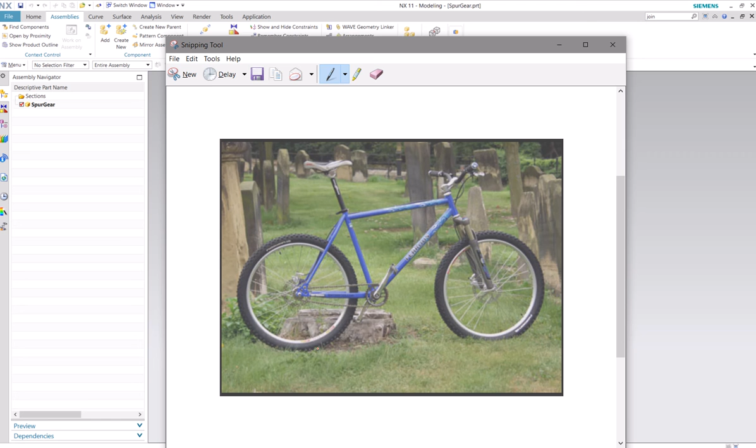Okay, so now we're gonna try and put all this stuff together. So if we're looking at the back gear, let's say this is the one we made, this gear, and this is the other gear up here, and this is the chain. We're gonna try and make next sort of a guide pattern that goes along here, just have something to guide the constraints and lay all the chain links on.

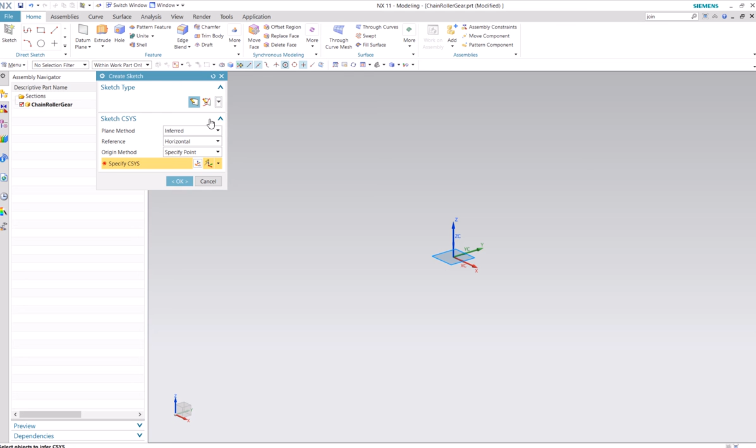So let's make a new assembly in whatever folder, chain roller gear Spur. Okay, not gonna add anything for now. Just do a sketch. Whatever. We'll do that one, and then we'll do that guide that I was just talking about.

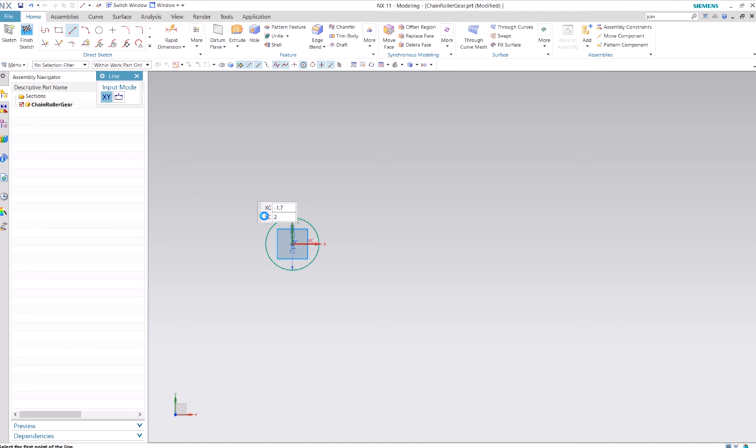Our diameter where the chain is, the path that's gonna follow along, is 1.9 on the gear that we made. And let's make just a guideline, let's say 8 up here, and then we'll put another circle up here to represent the front gear. Let's say it's 3. I'm going to delete this and then add lines attaching these two from the edge to the edge.

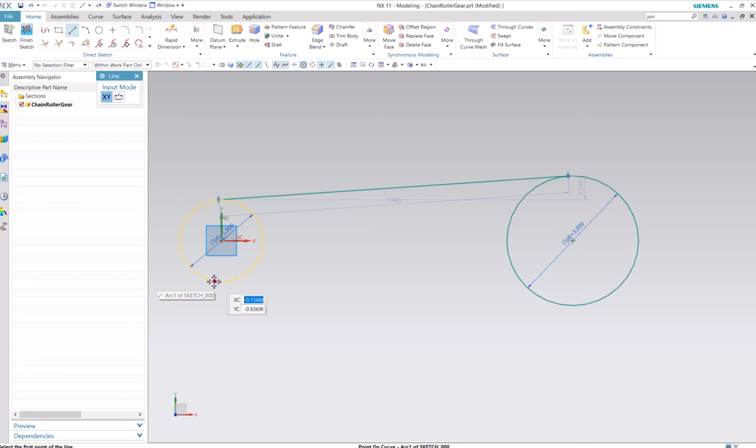Same thing down here. Okay. And then trim away the insides. Okay, hopefully that's saved.

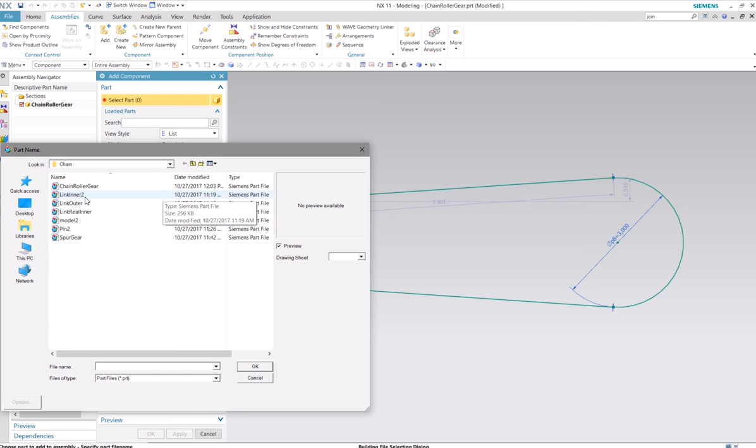Let's bring in one of those chain components. So we'll add the link inner 2, which is actually the link outer, I guess, for this case. We're going to want the reference set to be entire part and not model, so make sure you change that. That should bring that in.

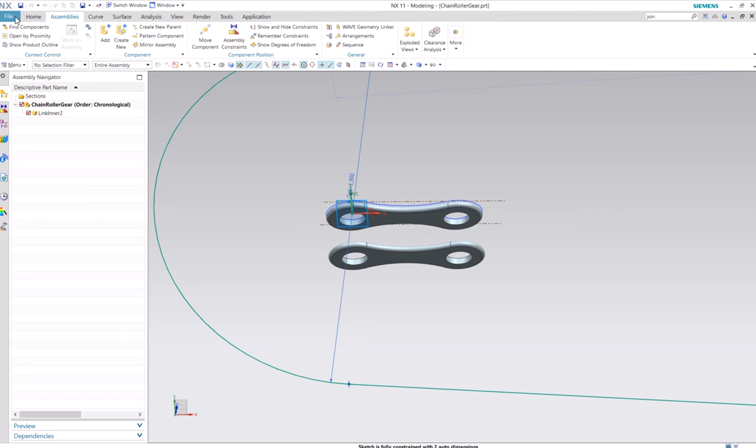Looks like our guide features didn't get saved, maybe. Let's check on that real quick here. Alright, so let's throw those in again. Maybe yours will still be there. I thought we did this for both.

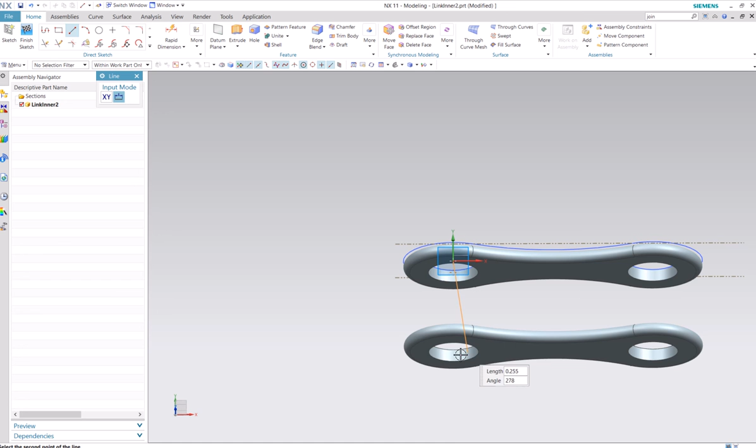Okay, so that's just a center line here to here. Okay. Reference and a point at the center. Okay. And we'll do that down here. To the center. And point at the center.

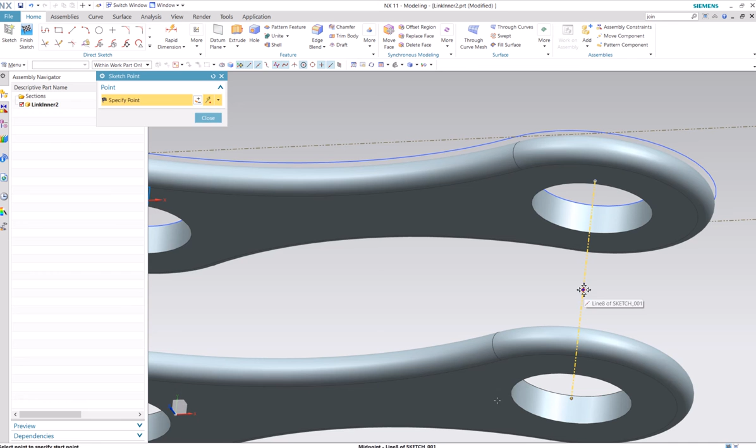Alright, and save this time. Alright, now hopefully that works. We'll go back into our chain roller gear. Okay, there it is, good. So that's what we wanted to see.

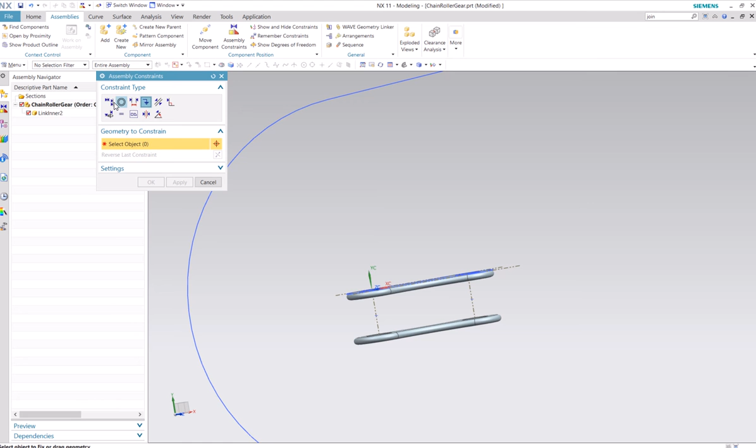Alright, so now we'll do some constraints with this. We'll do assembly constraint, we'll do a touch, and we'll just pick the little point in there, and then we'll pick our, hang on a sec. Oh, right, one thing first with this outer guide is that

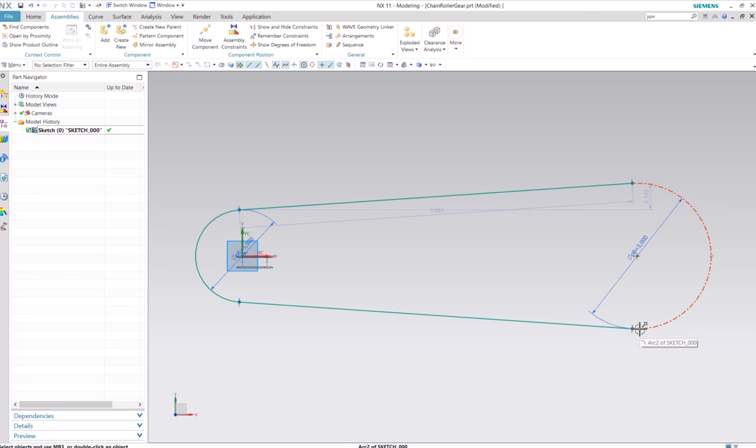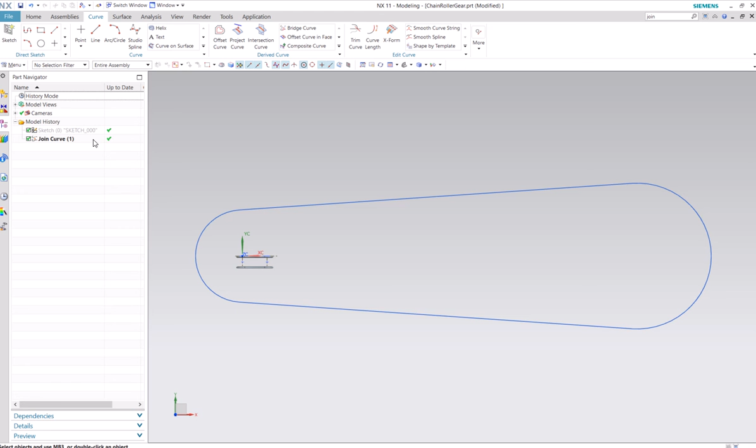we're going to want these curves to be joined, so we'll just, where is that curve, more join curves up here, and then it's already picked them for us, so it's selected the 4 on the outside, and we'll just join those, so that'll give us a join curve instead of individual little lines. So we'll hide that sketch and just leave the join curve available to constrain to.

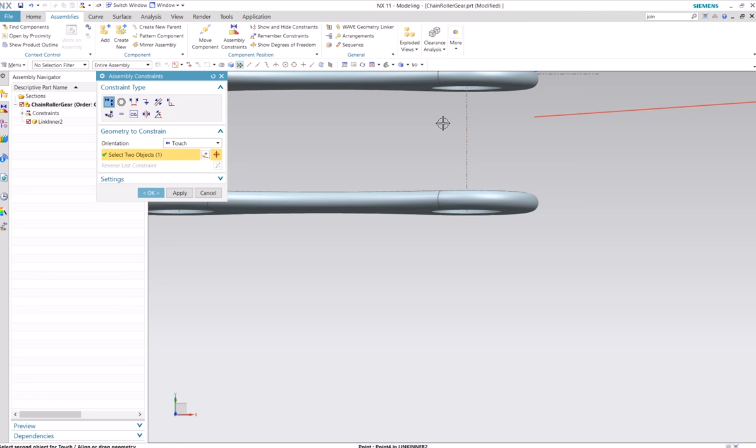So I'll come back here to our constraints, and then we'll do a touch from this point to this line, and same thing back here. Point to line. That'll stick that on there.

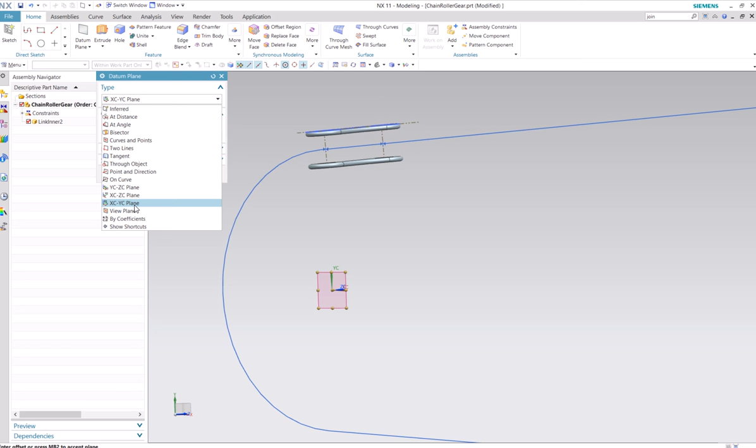Okay, so now this isn't the right direction that we want. We want this to be rotated 90, I guess, so it can travel along this path. So we're just going to throw in a datum plane, and we'll just make that an XC, YC, or whatever is sort of in the same plane as your curve. So this is all parallel to this. 0 inches is fine. That'll be a good reference for our assembly constraint of parallel.

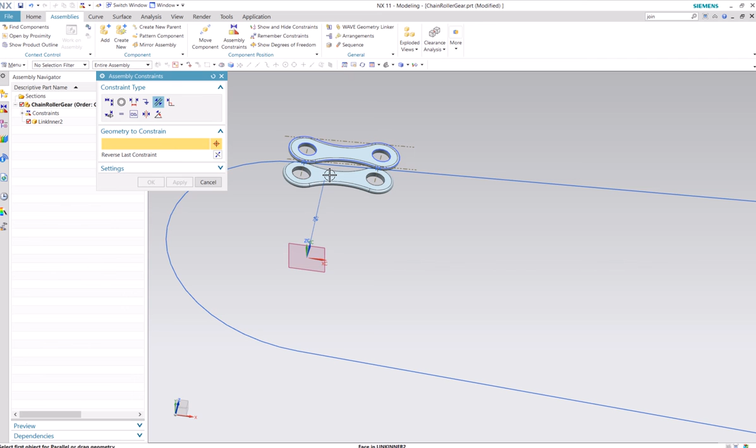We'll select the datum plane and then one of these faces here. So that'll turn that around and make that parallel. So now we should be able to move this, right click, move, and by dragging it, it should stick to that curve that we made there. So it kind of just works itself around there. Like that. Good.

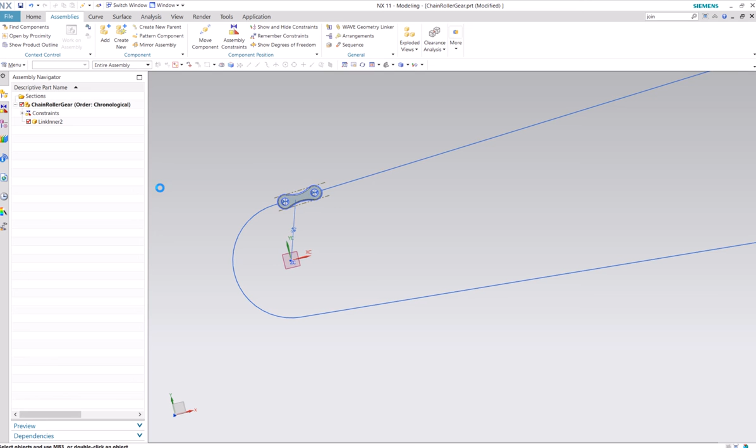Okay, so that's a good start. We will save that and then add a new part. We'll add the real outer. Let's check in the folder. Or real inner, I guess. Make sure it's entire part. And then OK.

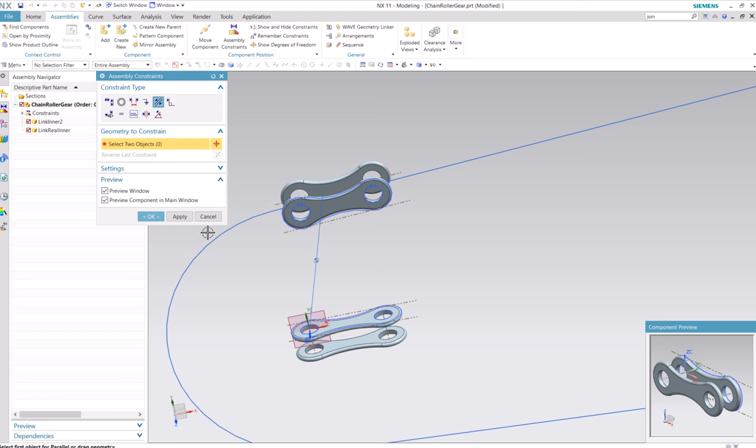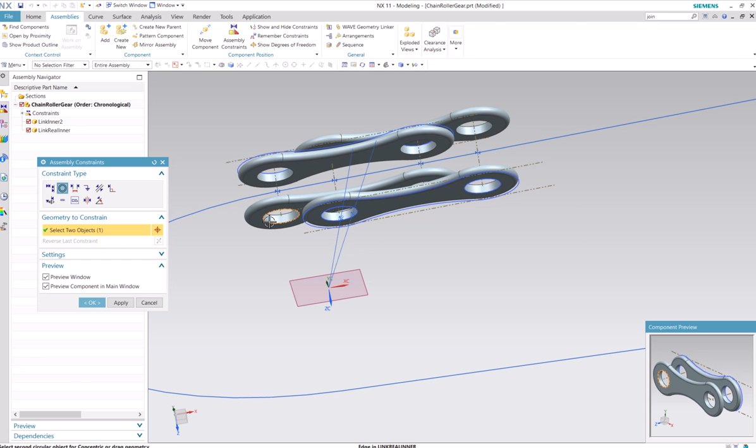Alright, we will do, I guess we can start with the parallel. And we will throw in a touch. Point to line and point to line. And then we'll just do a concentric outer edge to inner edge here.

Okay, looks fine, and then we will add in the pin into. Okay. Alright, I guess we can just do concentric with this one. And we'll reverse that.

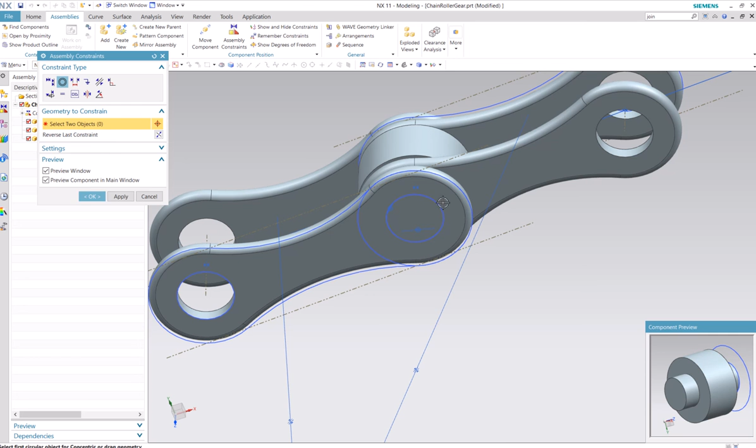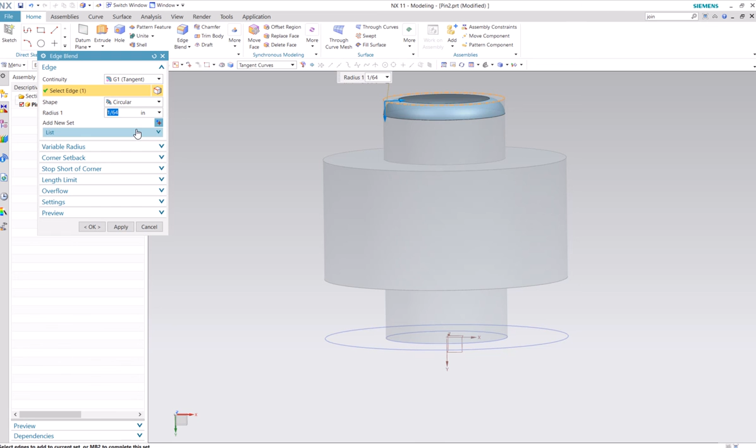Alright, that looks fine. Let's make a little change to the pin. We'll add an edge blend here. What is that, 1/32? No, 1/64. Yeah, and down here too. That should make it look a little nicer.

Go back to our chain roller gear. Okay, so now we see that in there. Yeah, that's fine. And we'll add in another pin.

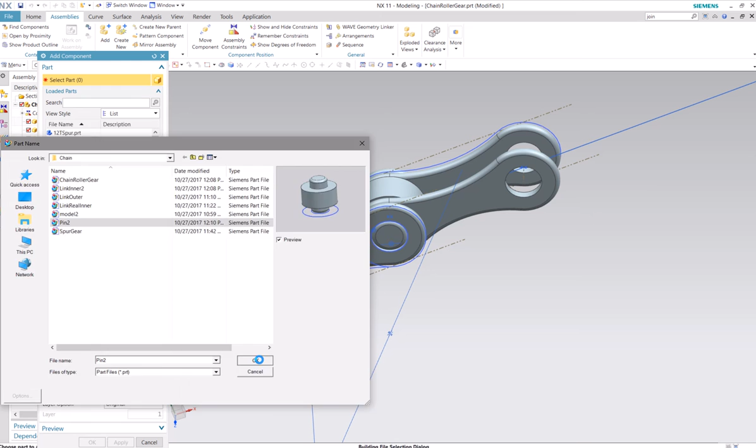We'll do concentric to here, and it pops it in there for us. Alright, so now we're just going to pattern this stuff out to kind of make it follow along this line.

So we'll do pattern component. We will select our components, so 1, 2, 3, 4, and we'll do linear. Let's do 6 or something. So these are 1/2 inch apart each, so 1 inch is fine. So this is kind of the base unit - it's 1 inch long from here to here, the repeating unit, so that should work.

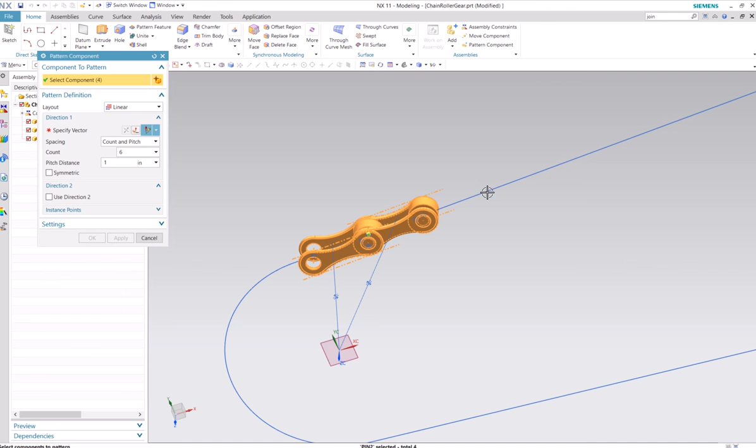We'll pick the vector. We will not pick our line. We'll turn the sketch back on. Let's see if that lets us do this. Pattern component. Okay, pick our parts. Linear, vector. Okay, so we've picked our vector.

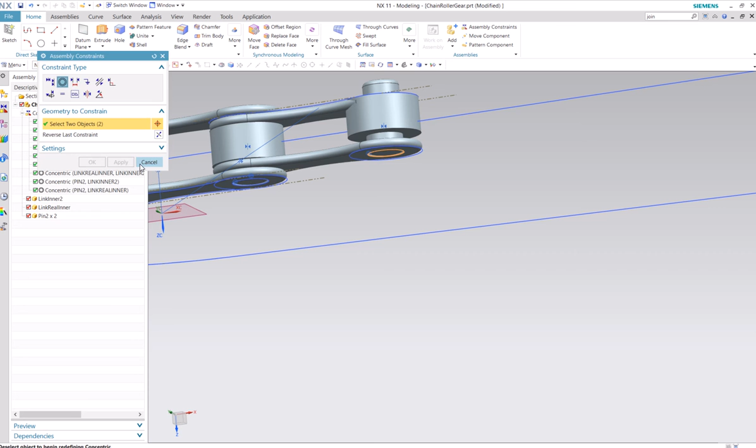We'll flip it around. Oh, looks like I constrained that pin wrong before. Alright, we'll fix that. Just redefine, and I'll delete that, and add a new constraint.

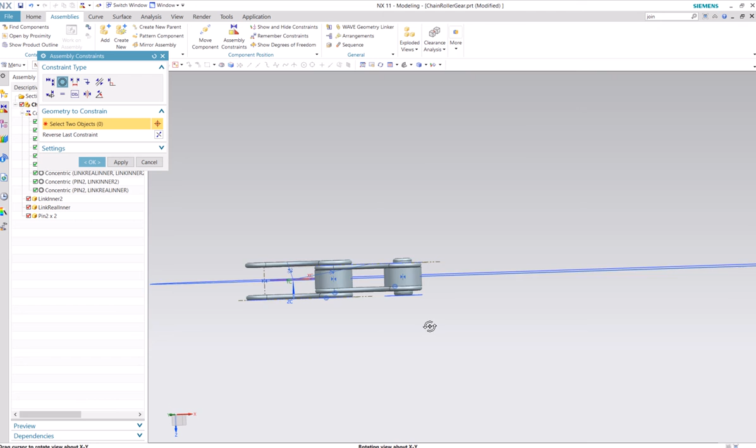Just gonna do these inside edges together. There we go. Alright, that looks better. Alright, back to pattern component again.

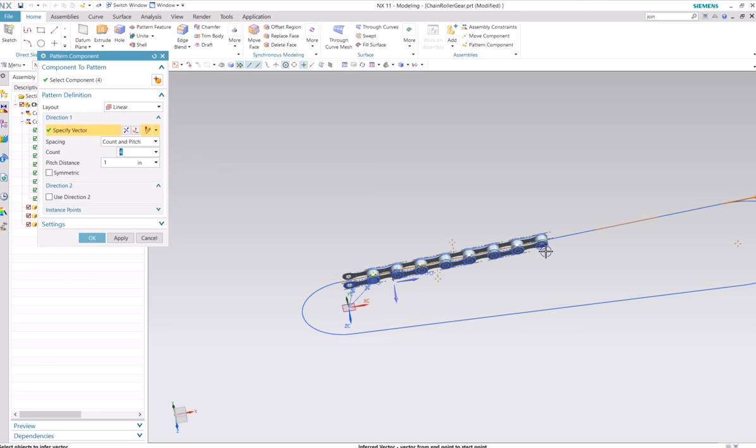Now, parts. Linear vectors here. Reverse direction. Let's do more. Yeah, whatever. 4 should be fine. We're not going to do this whole thing, but that's good, just enough to see what's going on.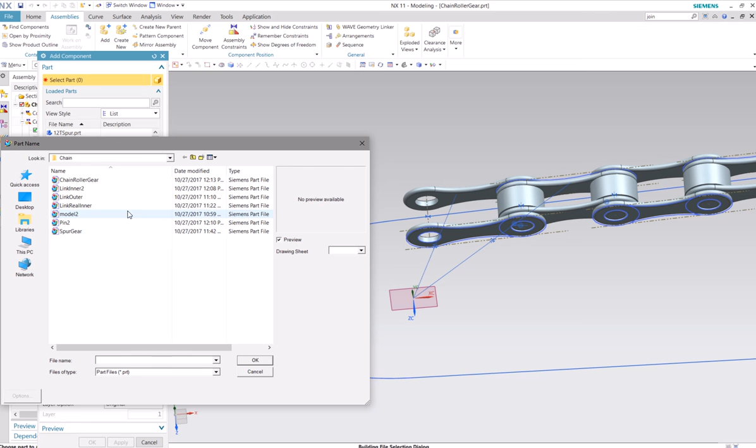That's looking good. Now let's continue the other way, which is a little trickier. So we have an outer, we'll do an inner next. We do have to get it started manually a little bit, but then we can make it do it automatically once we get going here.

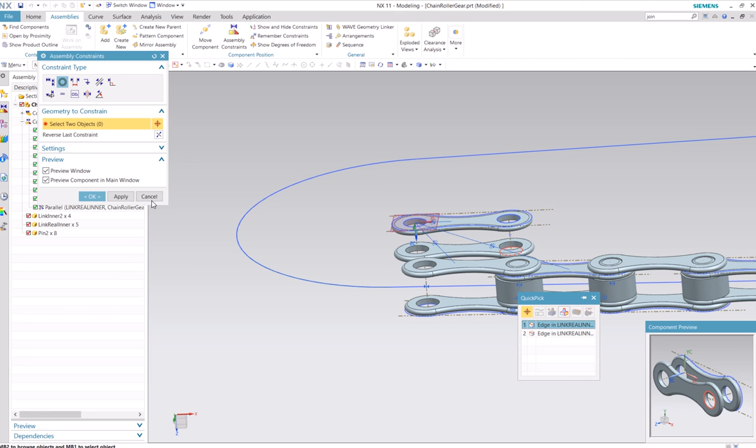Alright, so parallel, face to datum, and concentric, outer to inner. Oh, actually, let's do the other ones first. So we'll just do the touches first. I think that'll be easier.

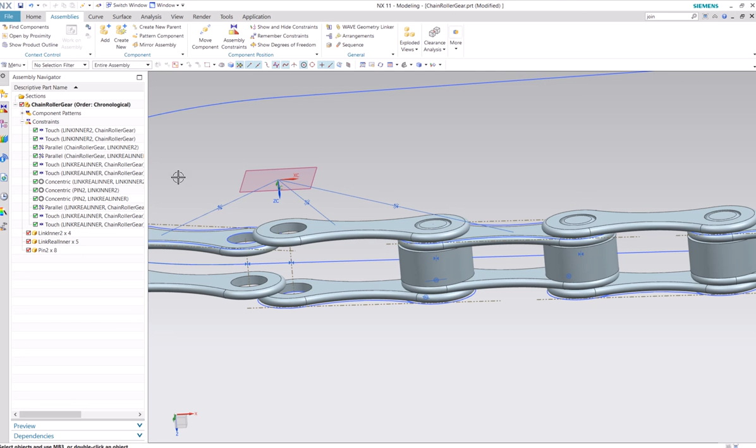Touch to touch, and touch to touch. Okay, just moving it so I can see that edge to attach to this constraint, but just a concentric here to here.

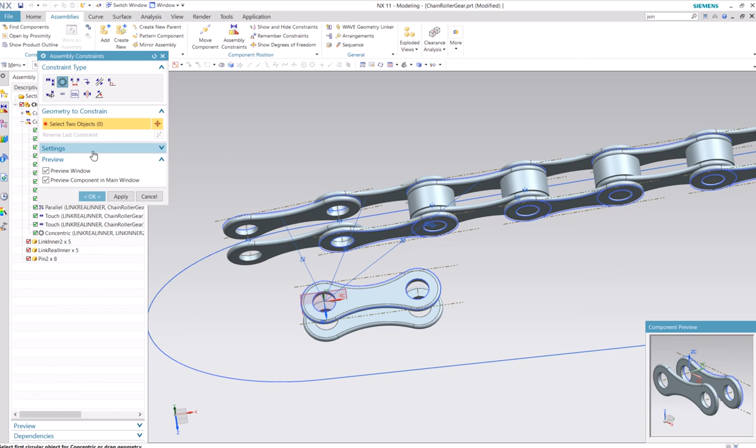Okay, now I'll need an outer. Okay, parallel, parallel, parallel. Yeah. Touch. Center to center.

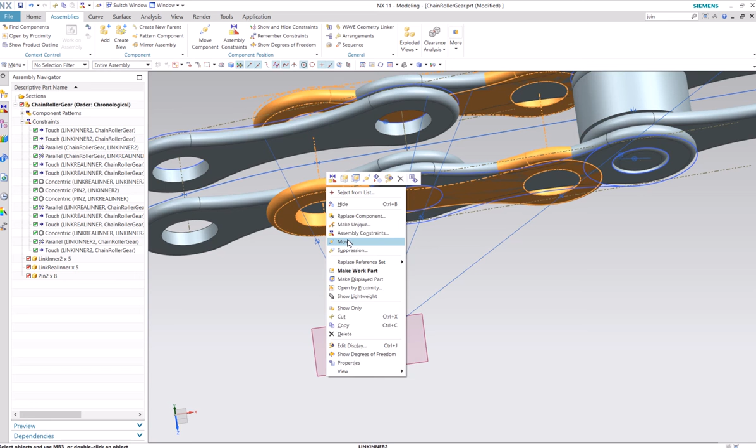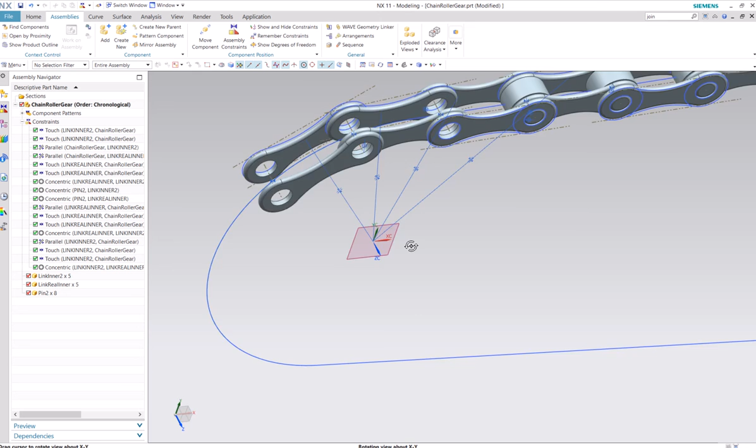Alright, and concentric. What is this? An outer. The first one may not be far enough along the curve. Let's just do one more inner.

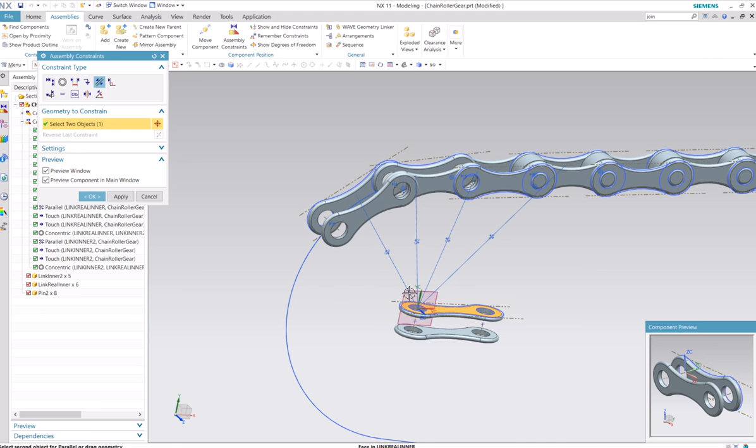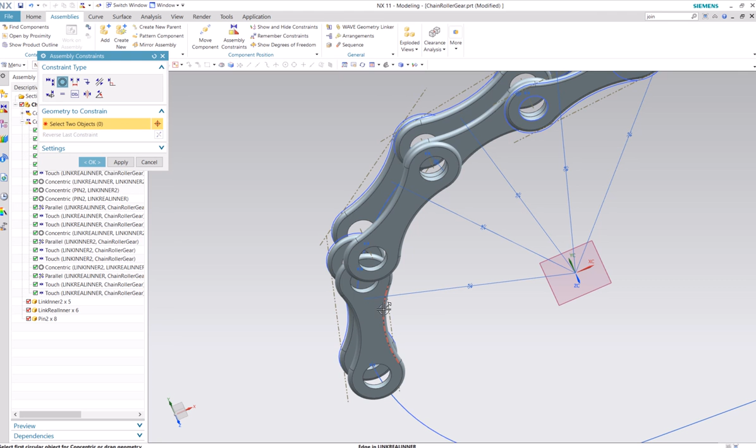Okay, parallel. Let's see if we move it first, if it will stay over here out of the way. Alright, touch, touch. Yeah, sort of. And concentric, outer to inner. Alright.

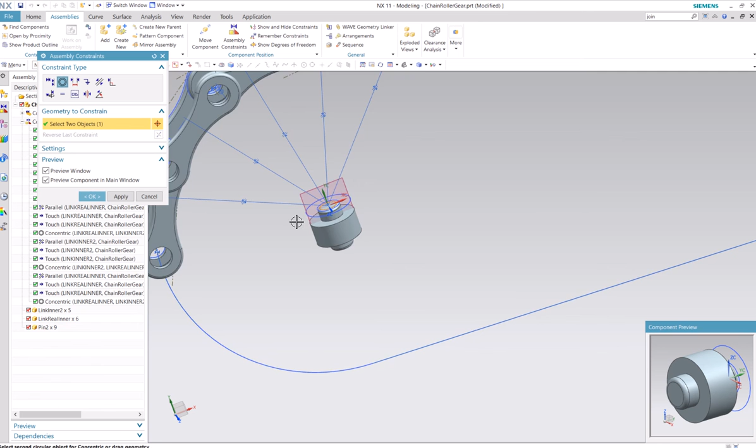Alright, let's put our pins in there. Pin, just a couple concentrics in here. Just add all these in.

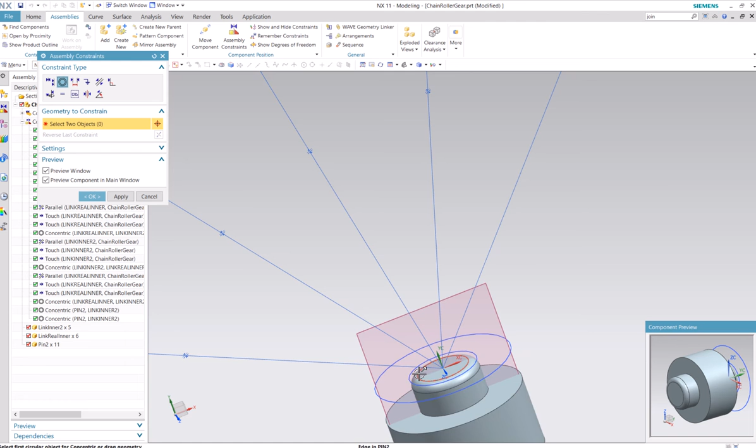Oops, clicked that one wrong. Alright. Okay.

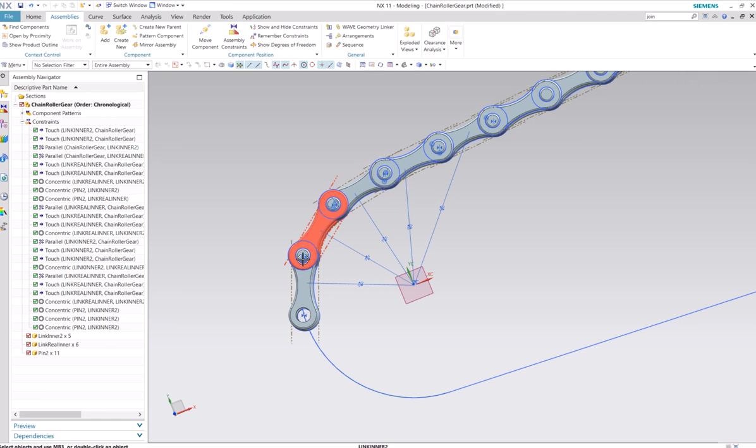Alright, so now we've got enough of a pattern to make sure it's along a curve. I was a little concerned that the straight line might begin around here or something, so that might make the angle of this a little bit off what we need to pattern. So since this one's definitely on the rounded edge, we should be able to pattern these two around and keep them going correctly. So we will do pattern component.

Alright, this time circular. We'll do these guys. I'll do a vector around to that one, the point, center point here. And good.

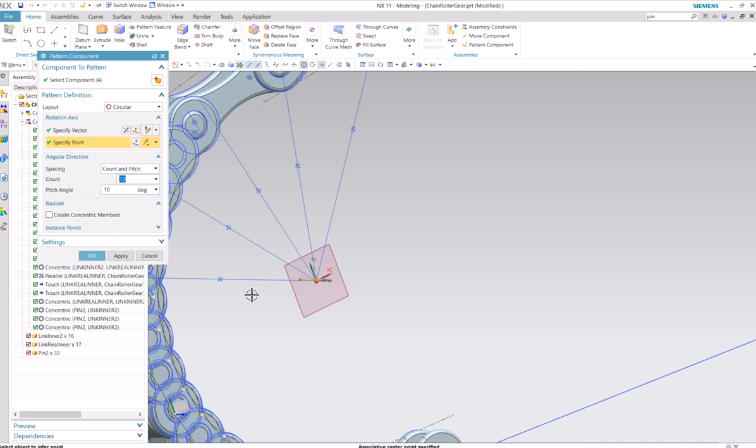Okay, so let's get these out of the way here. Yeah, that's in the way too. That looks pretty close, actually. Alright, let's just double check to make sure that the angle is right.

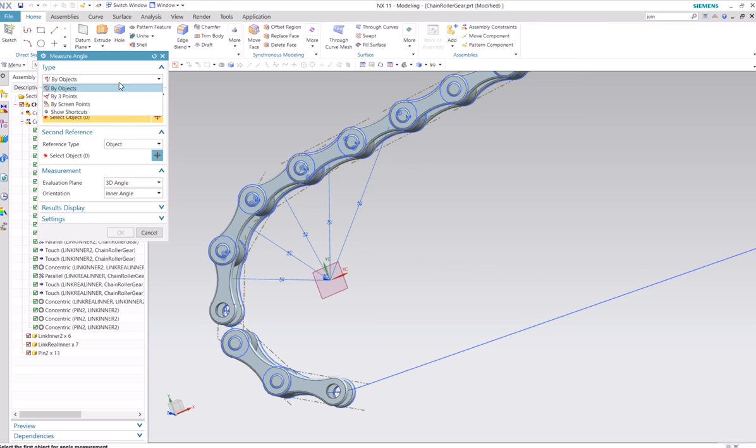So what we can do is measure it by objects. We'll do by 3 points, specify points. So we'll pick the center point. We'll pick our first point.

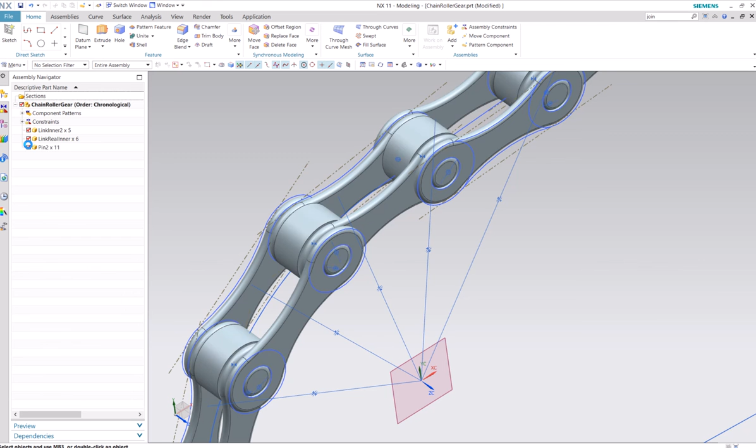Actually, what we need is that center point in there, otherwise we're going to get a slightly different angle if this is not on the center. So that was what I wanted. Let's see if we can do this.

Okay. Right, what am I doing here? This is a component. Great, now my pins are gone. Alright, well, we'll just measure it. I think it's going to be almost 60, and if it is, we'll just assume it's 60.

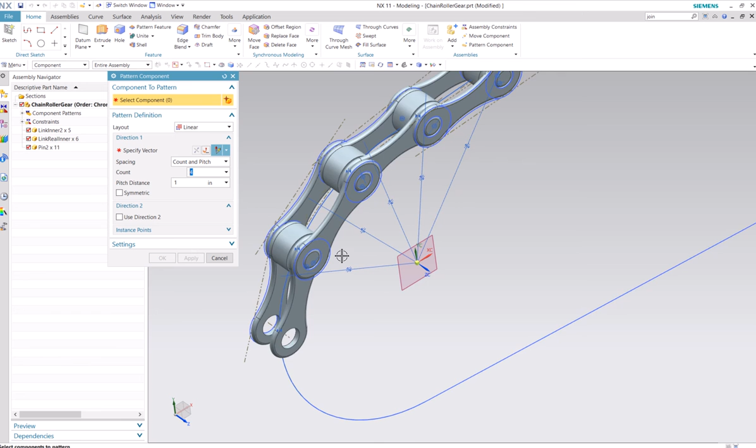But at least for future reference, you can use this measure tool right when you're doing stuff to make it really easy to figure out what you need right away. So just do 3 points.

Okay, so that's almost 60. Like I was saying before, this is a little twisted and it's not centered, so we'll just hope that 60 is right. It should be.

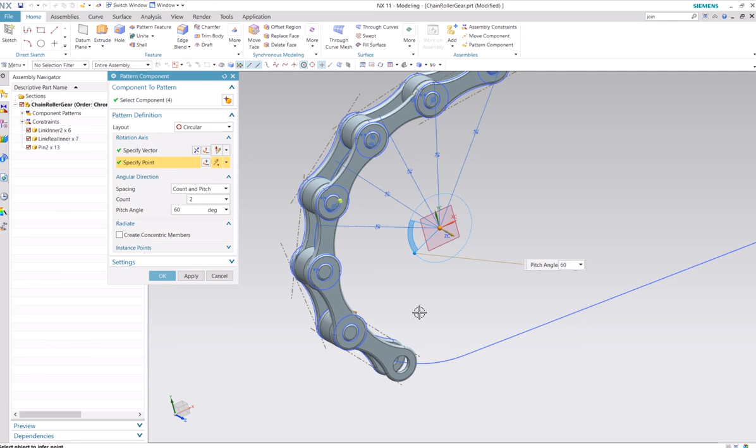Oops. And that one, let me do it. You can just do a formula and type in 60 here. Okay, that should be fine. Let's do 3 just in case. Okay, that looks fine. This last one's off a little bit, but we can fix that.

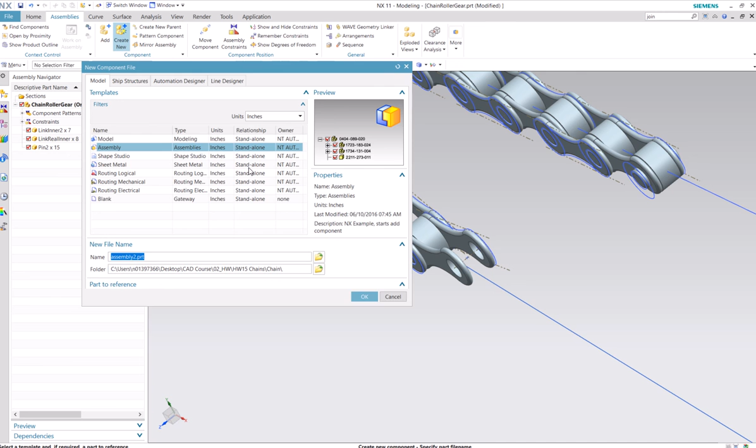Okay, should be good. Alright, let's see if this will adjust or if we need to delete it. So just add an assembly constraint, we'll just touch this point back to this line down here. Nope. Alright, it's gonna want to stay in that pattern feature kind of shape, so we'll just delete this one.

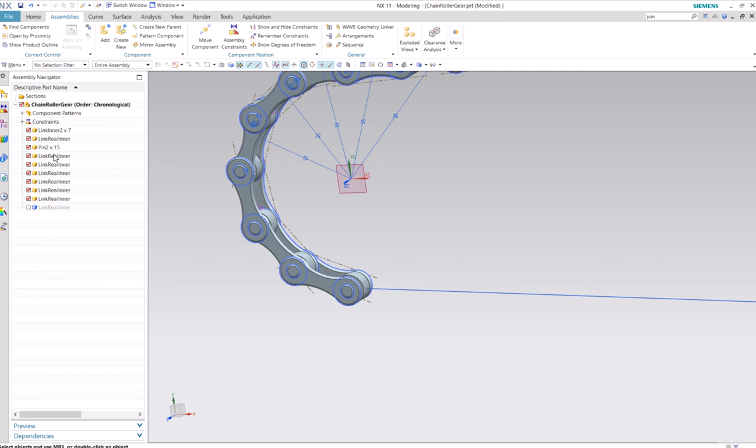Huh, really? Okay, it's not wanting to let me delete this one. I thought you could, so we'll just unpack these guys and suppress this last link always, and hope that fixes our issue.

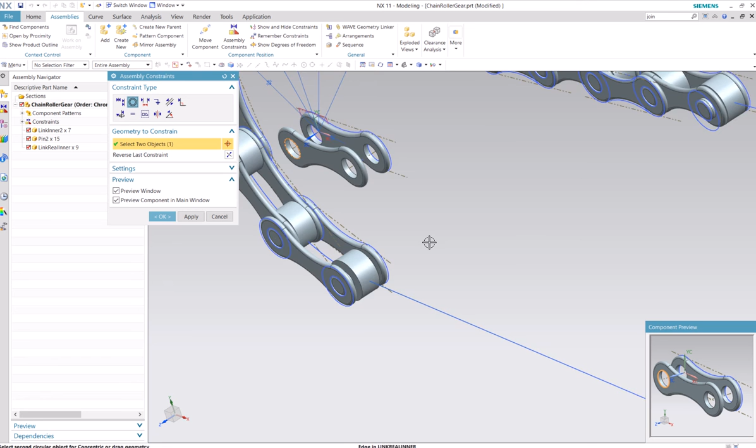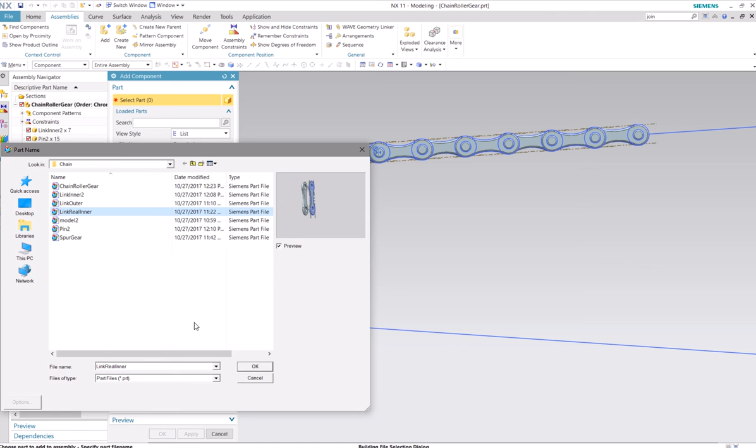Okay, let's throw in a few more links here. So inner, real inner. Alright, let's do the touch first. Actually, alright, lost it, real inner. Okay, parallel. Or not.

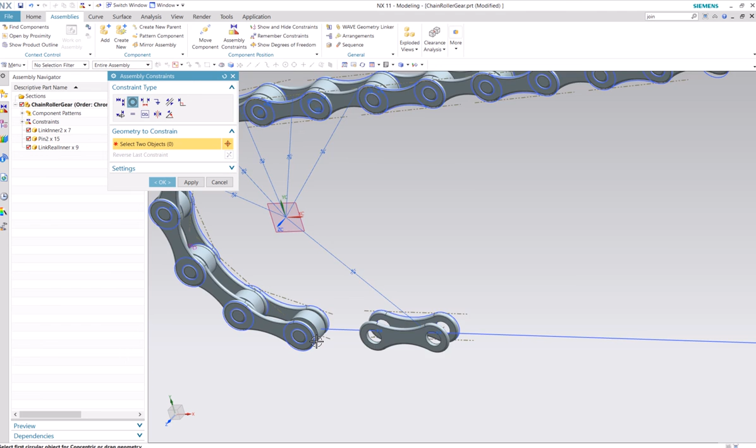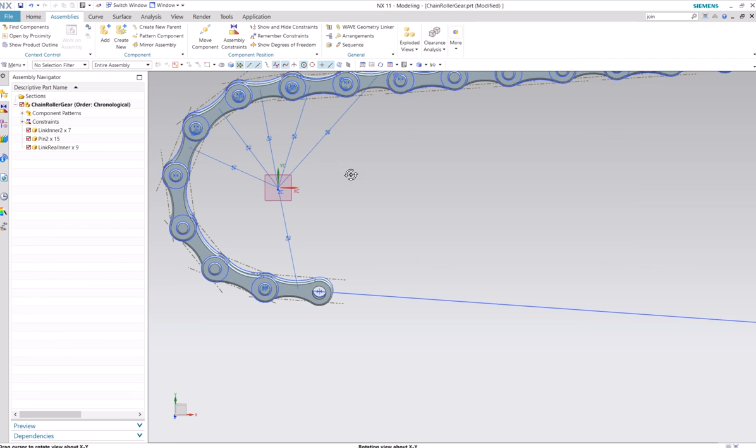Alright, and then, oops, just one more outer here. Alright, parallel. Okay.

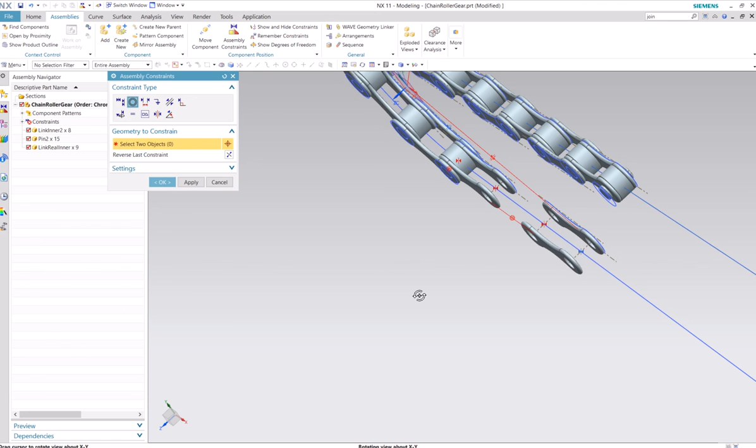Okay, that last concentric constraint didn't work last time, but it did this time for some reason, so I must have clicked on something wrong. Alright, whatever. Okay, and a pin. Concentric.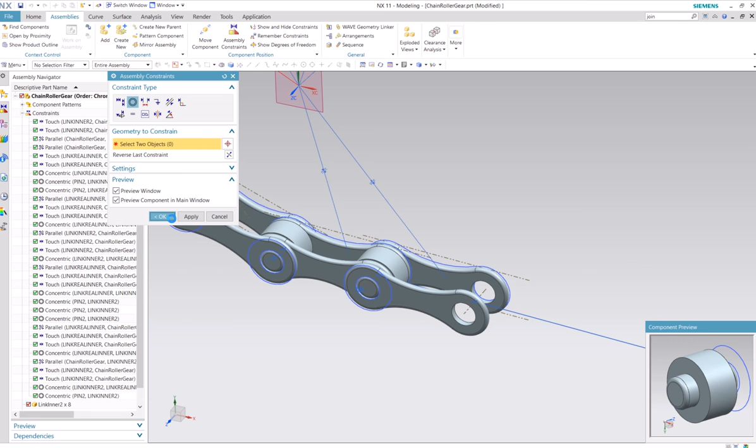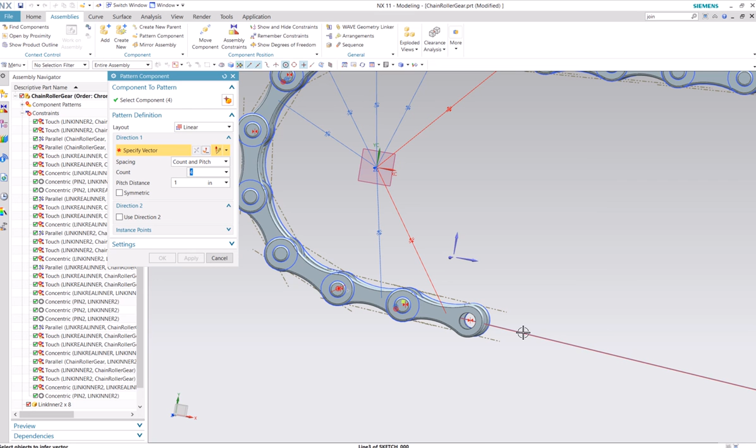Okay, we have red things that are angry at us, but we will ignore them. Okay, pattern components, and let's do these guys. And linear, let's see if it lets us pick this. Yes. Flip the direction. Four's fine, 1 inch is good.

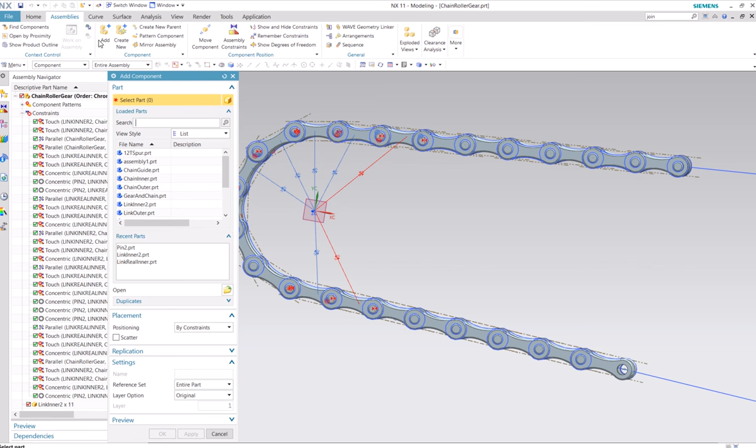Alright, almost there. Now just add that spur gear that we made. Okay, we'll do a parallel again. And...

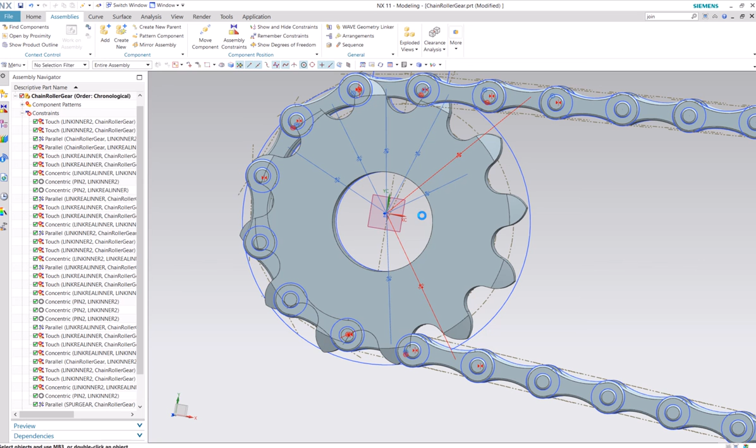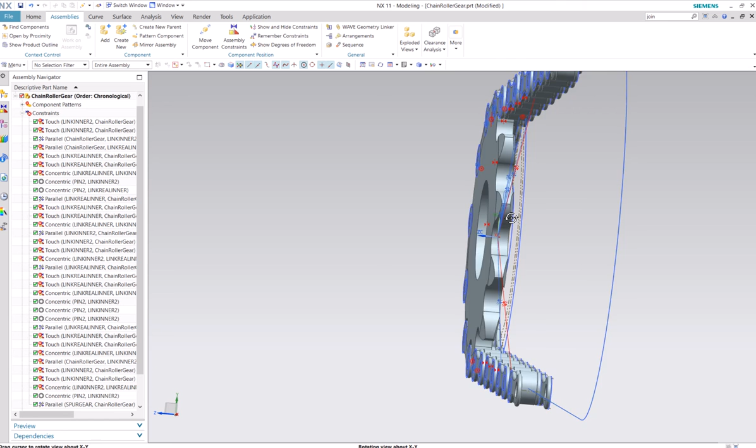I'm just going to try and move this into place, and we'll try and do a constraint. Just a touch of this face to this one. Let's see here. Okay.

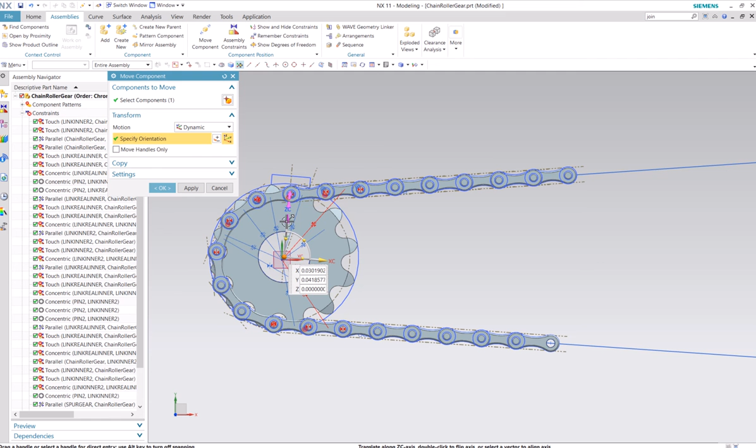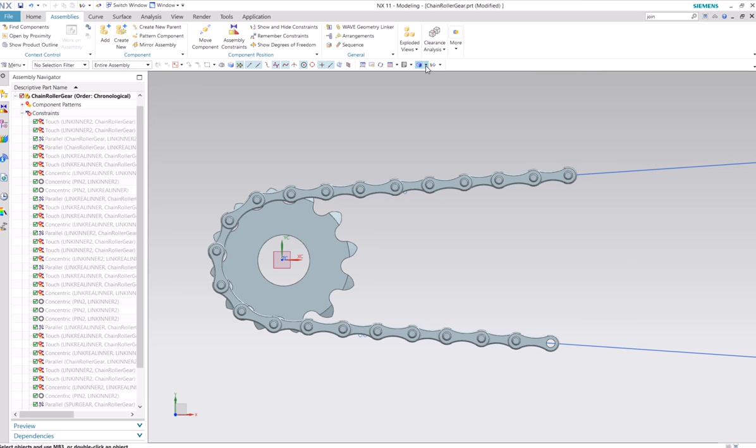Okay, computer's having a little bit of issues with this, but yeah, anyway. Alright, so there's our gear. Let's get rid of some of this nastiness going on. So we'll just remove the sketches, remove the constraints. That'll leave us with a nicer little image there. Okay, so that should be it.

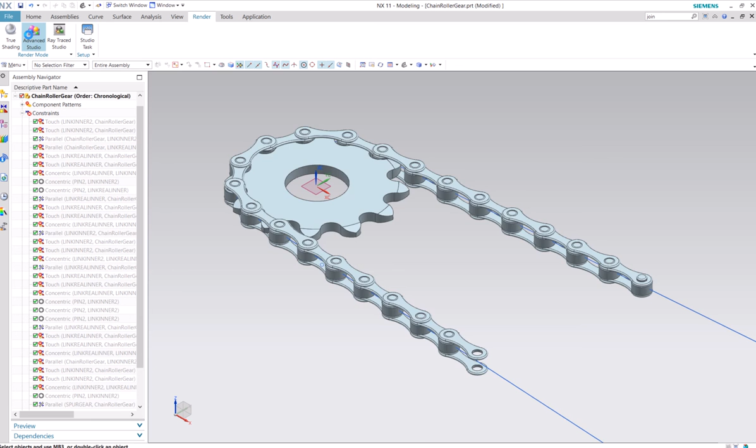Okay, so for the homework, just make this and then do a rendering of it. Let's do Advanced Studio and... did it. We'll just pick some materials, so that's down here in the System Studio materials. We'll pick some metal.

Yeah, you can pick whatever you want for these, just make it look nice. And yeah, just take a screenshot of this and submit it to Canvas by PDF. Okay, that should be it.

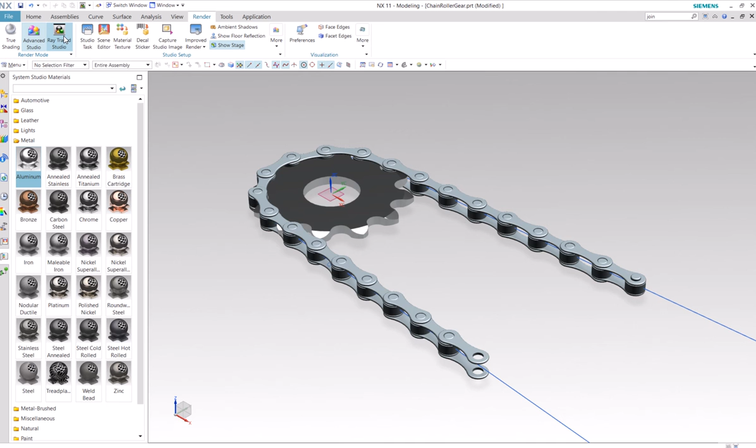Just as an additional part, I guess, just to make it look a little better, why don't we go ahead and actually render this for real. So just select Ray Traced Studio. You can set up your scene, edit some of the rendering settings, and then actually render the image with this button here.

Let that run for a while. Yeah, maybe at least 100 iterations, let it go for a few minutes. Select some nice materials, get something to look nice, and that will be it. Okie doke.